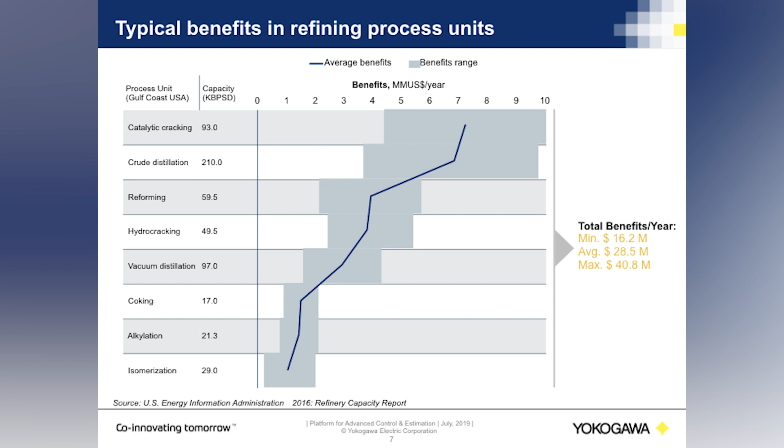However, we can use a standard thumb rule, a 50-40-10 rule, which can be applied for any process industry to quantify the benefits achievable through APC: 50% by variability reduction and pushing the plant towards the constraint, 40% by throughput maximization, and 10% by energy consumption reduction. This is just a standard thumb rule that applies for any process industry.

As mentioned by John earlier, we can have several intangible benefits like improvements in safety, improvements in asset reliability, lesser operator intervention, lesser alarm rates, etc. All these things can be easily achieved by APC, whether tangible or intangible benefits together.

Thank you, Saravanan. John, what would your advice be to customers on this webinar about implementing an APC? What should they consider before going ahead? What were the lessons learned through this whole exercise?

Well, for us, it's more than an exercise, we live it every day. But the things we've learned are, we really have to understand what's driving your process. APC is a tool that we implement, but it isn't a magic bullet. You have to understand what your process is, what the drivers are for the process. Once you understand that, APC can be designed to achieve the benefits you're looking for, to push that plant in the direction that you think is most optimum.

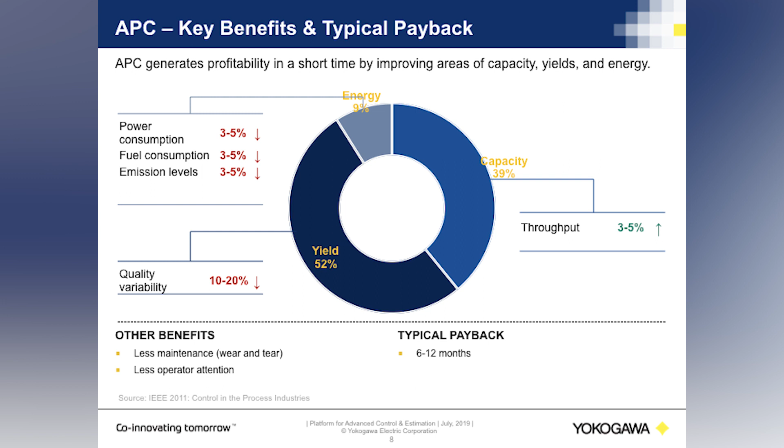Saravanan, any advice you'd like to add? Yes, I'd like to add a small point onto John's discussion. As John mentioned, a good base layer will act as a strong foundation for achieving good, reliable, and repeatable benefits from APC.

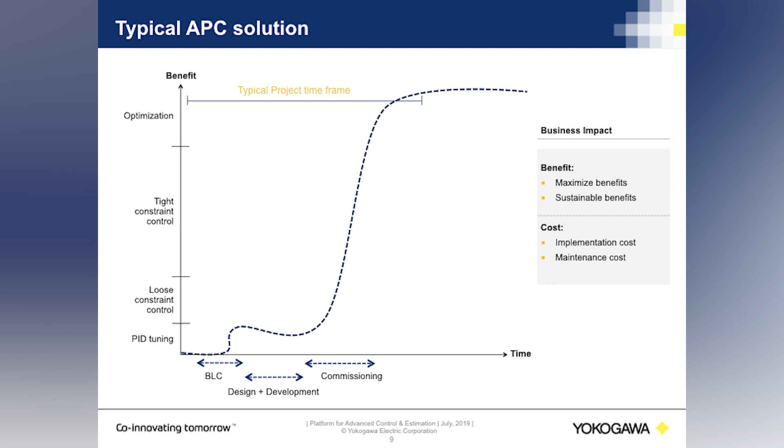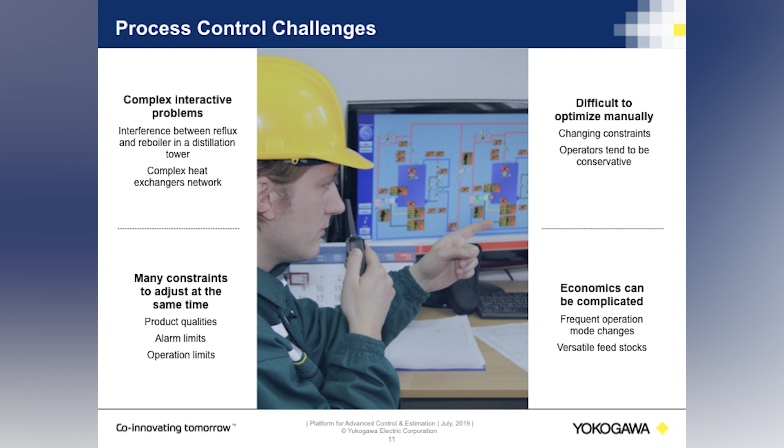Any processing plant will have some kind of DCS, distributed control system. Let's understand the difference between conventional controls and advanced controls, and why advanced controls are necessary to overcome the challenges we saw earlier so that end users are able to get the desired benefits from operation of the plant. Conventional controls are classic DCS-based controls like traditional PID controllers, cascade controls, ratio loops or lead lag. Those are typical controls existing on the DCS.

But the main problem with conventional controls is they are limited in handling interaction in a multivariable process. Many process variables cannot be interactively handled. It is very difficult to handle long dead time and coordination between the loops in traditional DCS-based controls, whereas all these limitations can be easily overcome with advanced controls. Typically, we end up with a SISO system, single input, single output, in conventional DCS-based controls, whereas we end up with a MIMO system, multi-input, multi-output, with advanced controls.

Conventional controls help to reduce the variability of individual loops, like a pressure, temperature or level loop; the standard deviation of an individual loop can be reduced. Whereas with advanced controls, we'll be able to reduce the variability of the entire process, a section of the process, or the whole plant. Also, advanced control helps us push the plant towards the constraint, basically towards an optimal point, as you can see in the bottom figure.

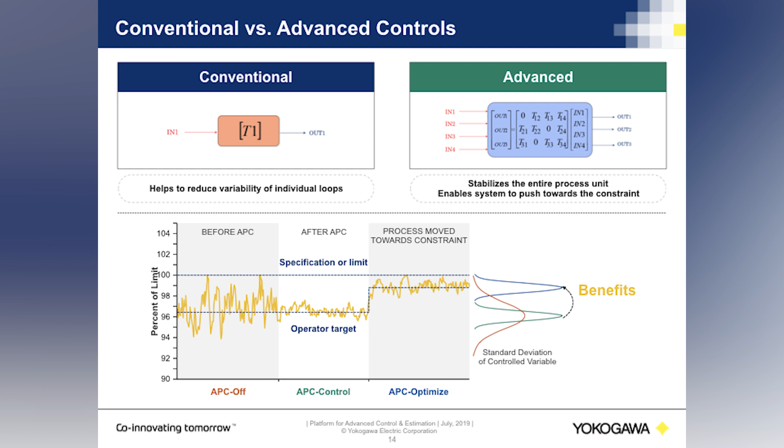Typically, the process will have huge variability as conventional controls cannot handle interaction in a multivariable process. With advanced control, the variability is significantly reduced, as you can see in the middle of the figure. Using the optimization function, we can push the plant towards the optimal limit or constraint to generate benefits. In a nutshell, APC eliminates the dead time, stabilizes the process, and enables end users to push the plant towards the optimal area. Thereby, we see direct dollar benefits as the quantifiable benefits achieved from APC.

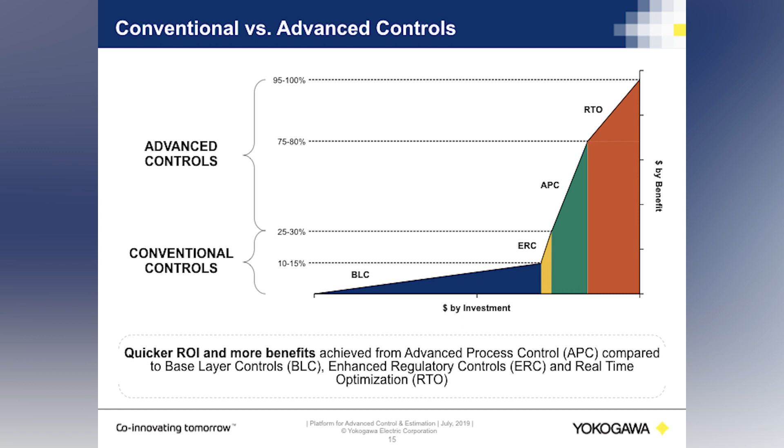So why is advanced process control required? Advanced process control is helpful for end users in achieving benefits or improvements in almost all areas: safety, efficiency, reliability of the asset, reliability of human beings. All those things can be easily achieved using advanced process control.

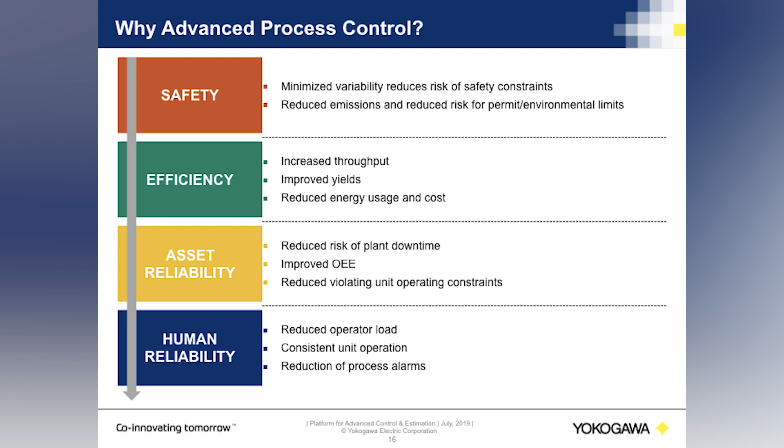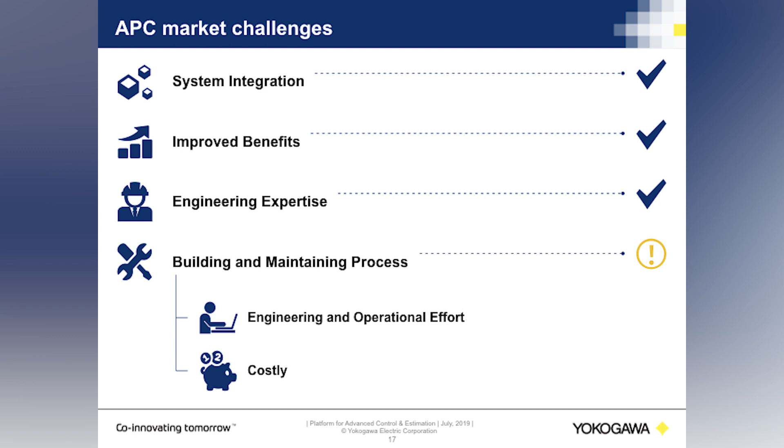Earlier we saw some of the typical process control challenges which any end user faces. But this slide shows the challenges faced by end users in choosing the right APC vendor: whether the package or vendor chosen has a solution that is easy to integrate with any DCS system, whether any tools and features are available with the APC software to identify the gaps in the benefits and improve the achieved benefits, whether the APC vendor has the right engineering expertise to safely execute the project, and how costly the solution is to build, run, maintain, etc. So these are some of the typical market challenges which any end user will face before they choose the right APC vendor.

Yokogawa and Shell co-innovated and designed the next generation of APC so that end users are able to reduce the total cost of ownership, reduce the engineering efforts for building an APC application, and very easily sustain the benefits. These were the most important things Yokogawa and Shell concentrated on in developing the next generation of APC. With Yokogawa's new APC, end users are able to maximize the benefit with very minimal investment.

Oprex is Yokogawa's brand for the industrial automation business. Let's see how Yokogawa supports end users to achieve operational excellence in their business, in any operational process. For any activity to be successful, we need to have 3 P's: people, product, process. We used to call them 3 M's also: man, machine, and method. All these 3 should be in an ideal or effective condition.

To achieve operational excellence in APC, end users need to consider whether the vendor selected has the right skilled people with the right product and right methodology available so that they can get the right benefits at the right time. If you do not have the right people or the right product or the right process, you may end up getting delayed benefits, or ROI cannot be achieved at the right time. Let's see Yokogawa's quick and fail-safe method of achieving operational excellence.

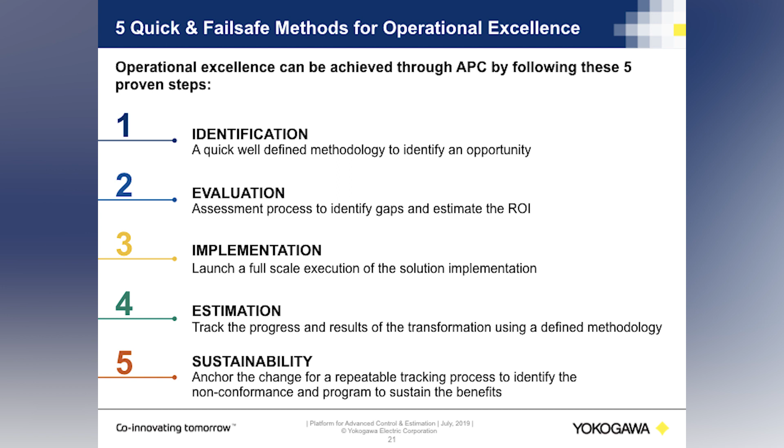Let's see the first step, identification. All automation vendors deliver an automation benchmarking report. This benchmarking report shows the effectiveness of automation in terms of alarms, automatic control or manual intervention, HMI, MOC, management of change, all those things. Yokogawa has a proven service called CEA, Comparative Effectiveness Analysis. This service delivers a report which Yokogawa uses effectively for identifying whether there is any potential for APC or not, just by using the report.

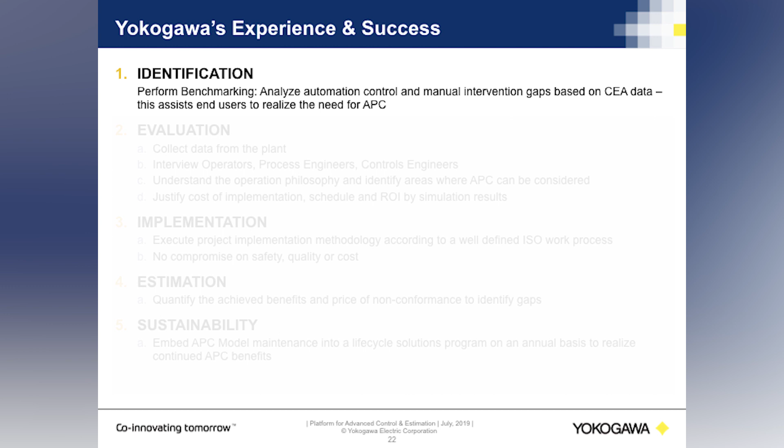Let's go more into the details of what is that CEA. So Yokogawa CEA service benchmarks the performance of the automation compared against similar running plants in the world. So basically this report clearly shows the end user what is their as-is condition and the gaps compared to similar running plants in the world. It may be a refinery or petrochemical or specialty chemicals or LNG. So we will be able to compare how a plant A is operating when compared to plant Z in the world, and where the gaps are available, with which Yokogawa effectively uses this service for quick identification of APC potential for any customer.

Once the potential for APC is identified, Yokogawa supports the end users in justifying the benefits through a well-defined structured work process by collecting the data, summer data, winter data, low load, high load, all those data we'll be collecting, and interviewing the operations people, interviewing the management people, developing a simulation and quantifying the benefits, how much they will be achieving out of APC. And this helps the end users to prepare a business case for investment justification to their management team.

And Yokogawa takes complete ownership in safely executing the project using our well-experienced consultants and engineers, followed by estimation of achieved benefits, how much benefits has been achieved as a part of the execution of the project, and then develop a life cycle program to sustain the achieved benefits in a repeatable fashion. So this is basically Yokogawa's experience, how we were able to achieve success on our projects.

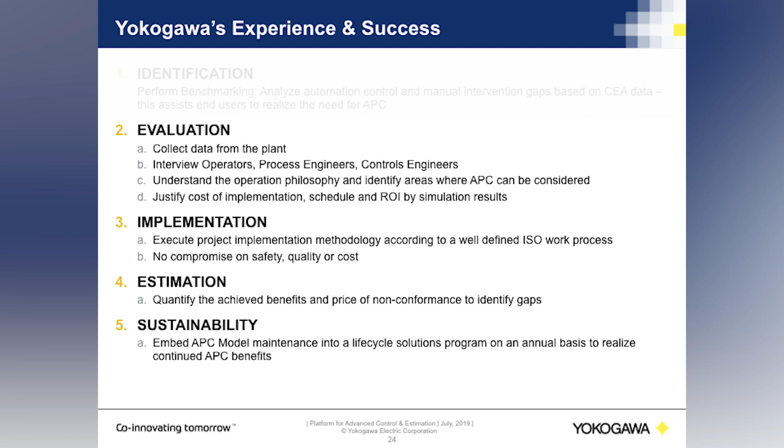Let's see how to count the price of non-conformance in operation of the plant. Yokogawa has a well-proven solution for monitoring the performance of APC on the web in the business domain of the end users. So this solution is basically used for monitoring and analyzing the performance of the plant, which section of the plant is not performing good, which section of the plant is not yielding the desired benefits, how much money the end users are losing by not controlling the process effectively, identify the bad actors, find the root cause for taking quick action so that they can sustain the benefits.

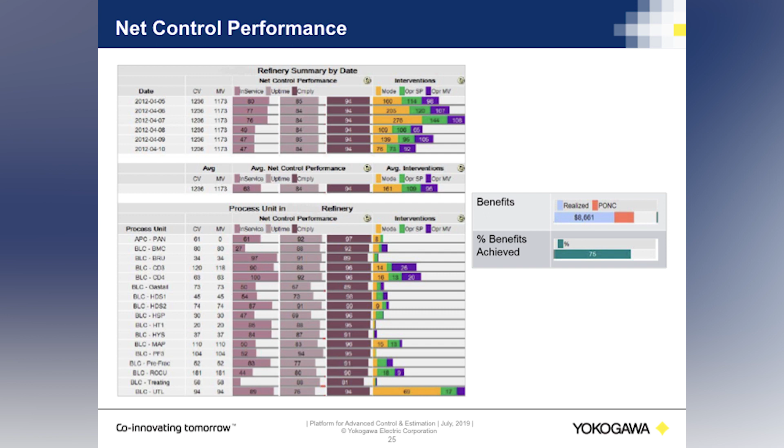And this visualization is available on the web, on the business domain. It can be viewed in mobile devices, so that the end users will be able to take quick corrective action. And also this is available in different ways actually. You can see the enterprise level performance, individual section level performance, individual asset level performance. You can drill down up to individual assets so that you'll be able to identify the bad actors, or the root cause analysis can be done.

Let's see an overview of Yokogawa's APC history over the period of time. Yokogawa has 20 plus years of strong APC alliance with Shell. And in fact, as John said, Shell are the original inventors of APC technology in the early 1970s and the leaders of APC in the refining market. As I told you earlier, we have nearly 2,000 applications globally running, successfully giving good benefits for the end users.